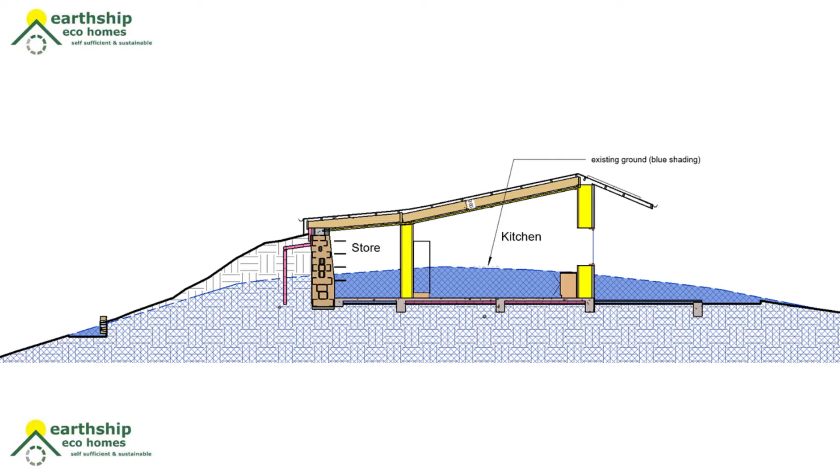So one of the first things that happened was Evie, as the project manager, owner-builder, she called up South Coast Sound and Civil, the earthworks contractor, to scrape off the top of that ridgeline. You can see there in blue, so I think about 100 tons of earth was stockpiled, ready to build the Tyre Wall and the earth berm that you see on the left of the slide there. So this photo is taken about a month ago. You can see the Tyre Wall on the right there.

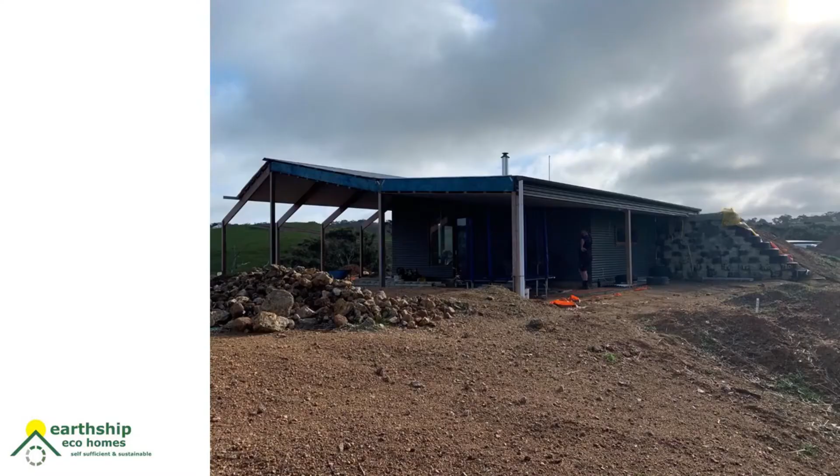Evie's doing a great job managing the budget. They're going to hit about 580 grand, which includes about 70,000 bucks worth of off-grid systems. Batteries, panels, rainwater tanks, septic system, all that business. And they're in about month 12 at the moment and hoping to get in by Christmas. And I think this is a fantastic achievement by some owner builders. So just a few shots of the building in September.

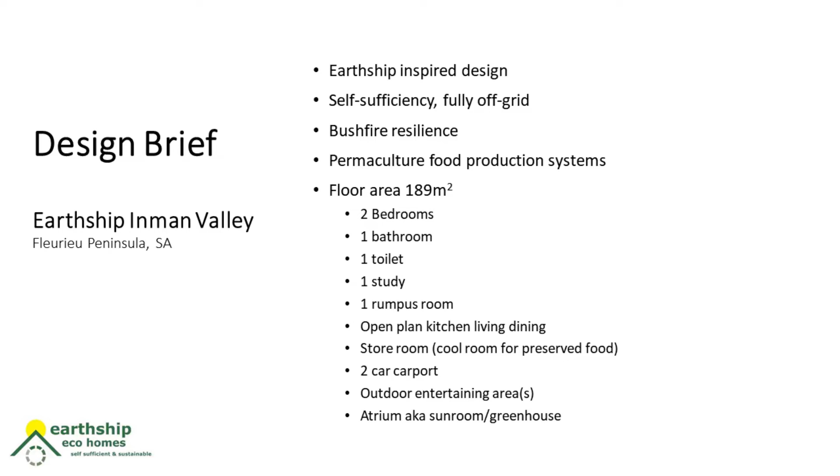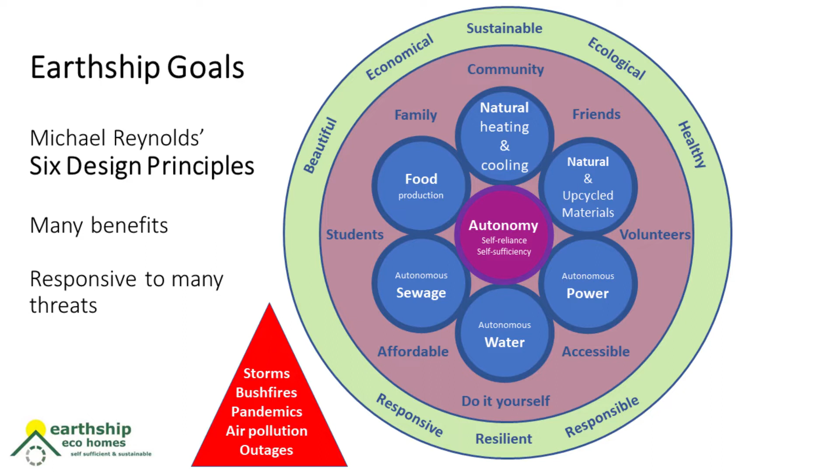But for this presentation, I want to focus on the one at the top there, natural heating and cooling, and also some of these themes like the volunteers, the students, family, friends helping build a community around this project.

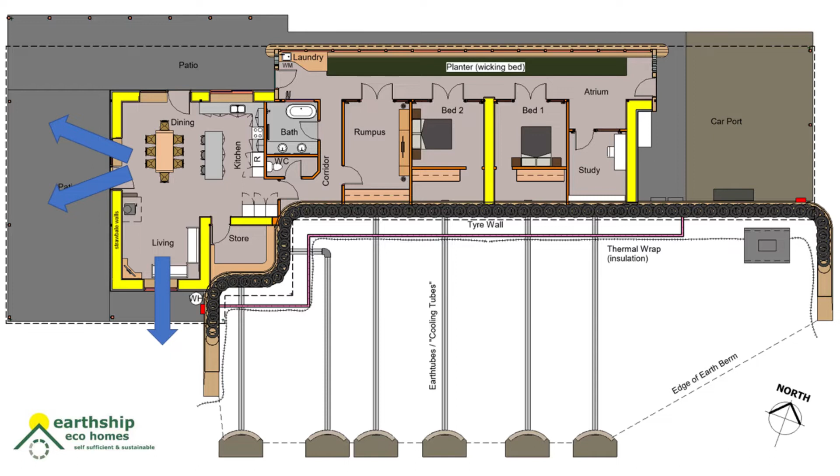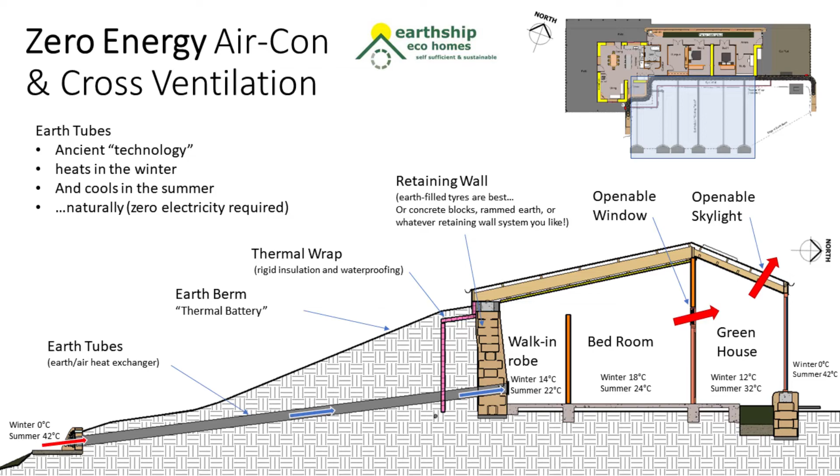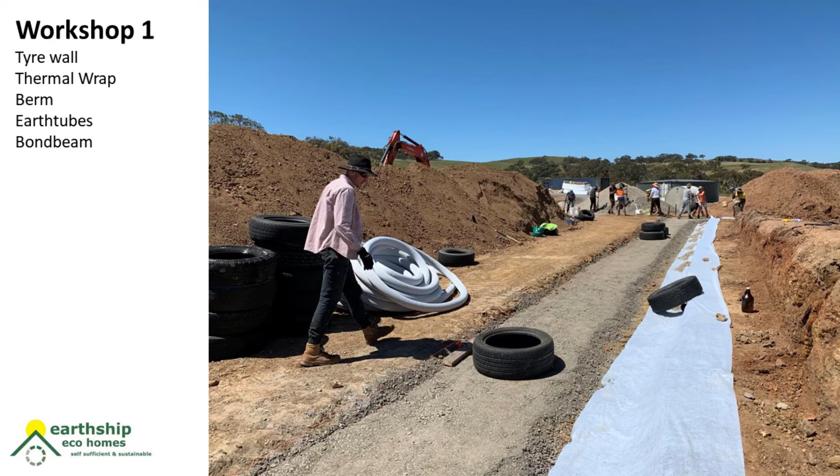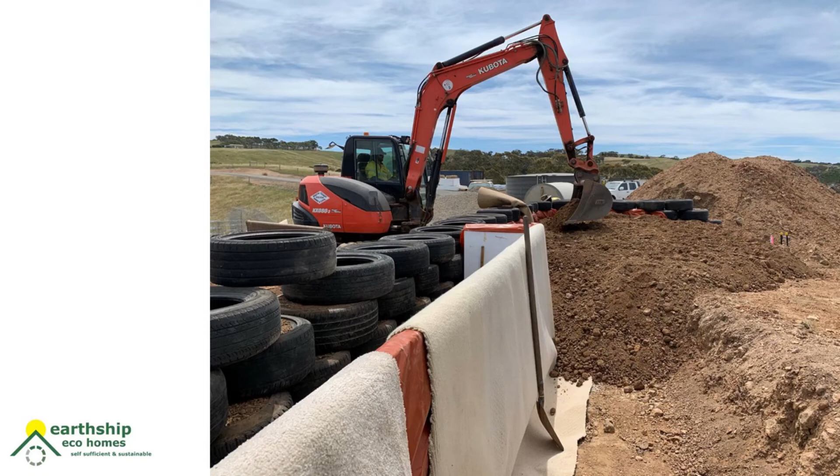I'm just now going to flick fairly quickly through a whole bunch of slides. This is day one of our first workshop last October. You're going to see this Tyre Wall under construction. It got built in about 3 weeks. We had about 30 volunteers. COVID actually messed with us a little bit. We had our first COVID lockdown in November last year, if you recall. So we were on site for about 4 weeks, camping, having a lot of fun.

So, you know, this is one of the Earthship things, is really trying to inspire people and make them realize that they can get involved in the construction of their own homes. That's the earth tube on the south side of the building. Tyre wall's getting higher and higher.

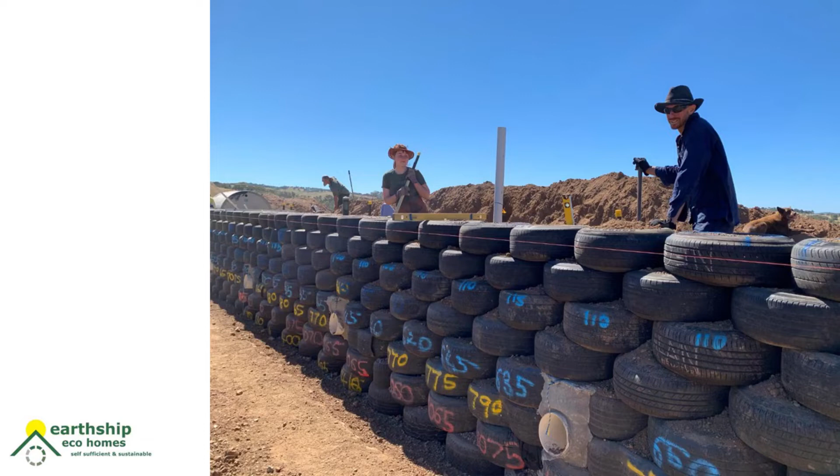Am I going for time, Ken?

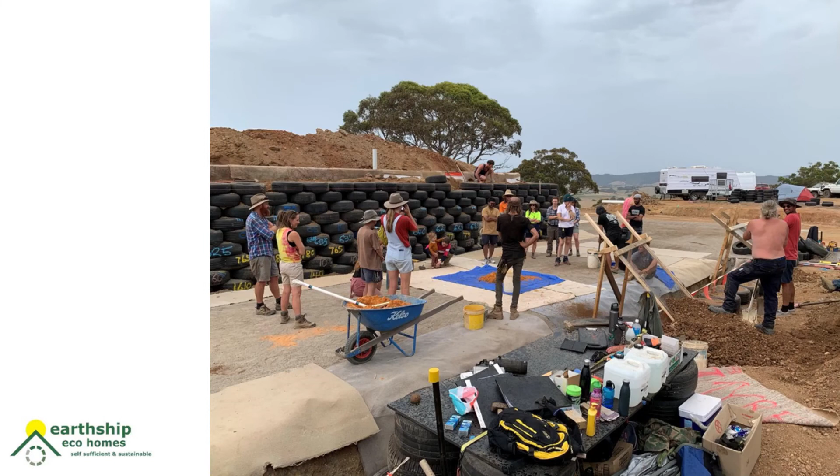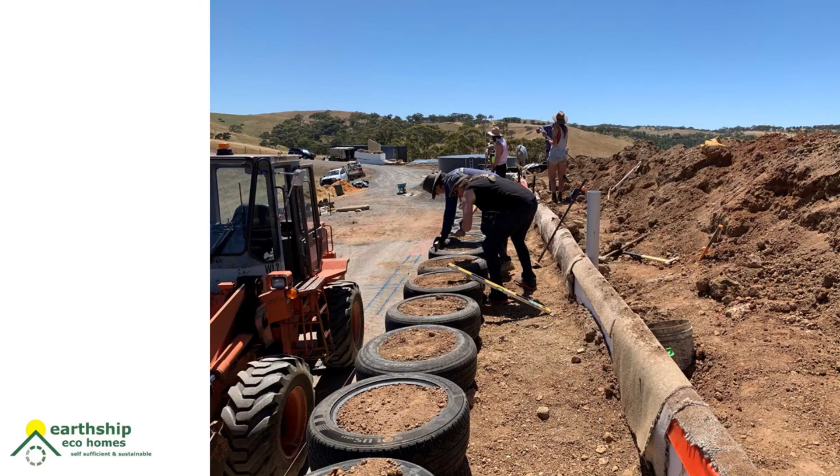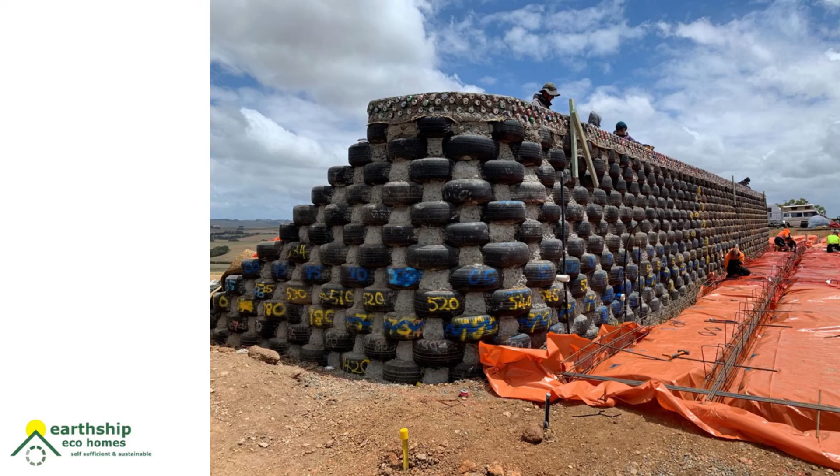You can see here the rigid insulation that goes in behind the Tyre wall and some of the waterproofing. Here we're starting to mix some cob. There's a cob man. That's not really part of the building. The cob goes on the Tyre walls to make them flat and ready to receive render. This is the concrete beam that goes on top of the Tyre wall, built with can wall formwork, lost formwork. That just helps us get that concrete beam done cheap and cheery with volunteer labour.

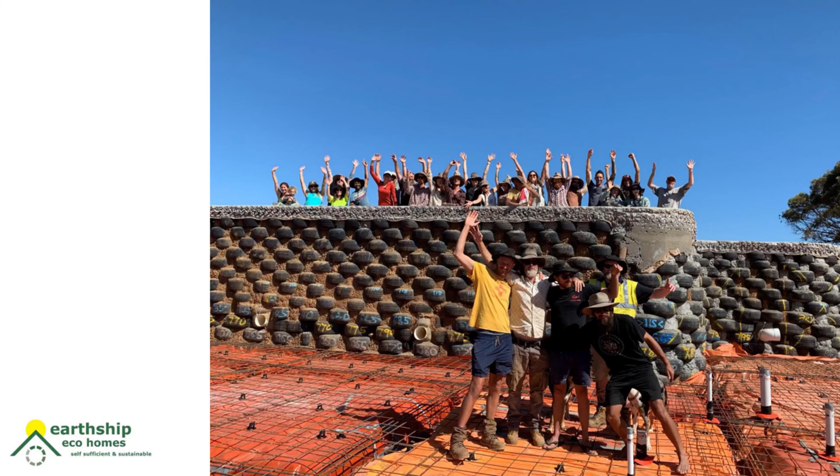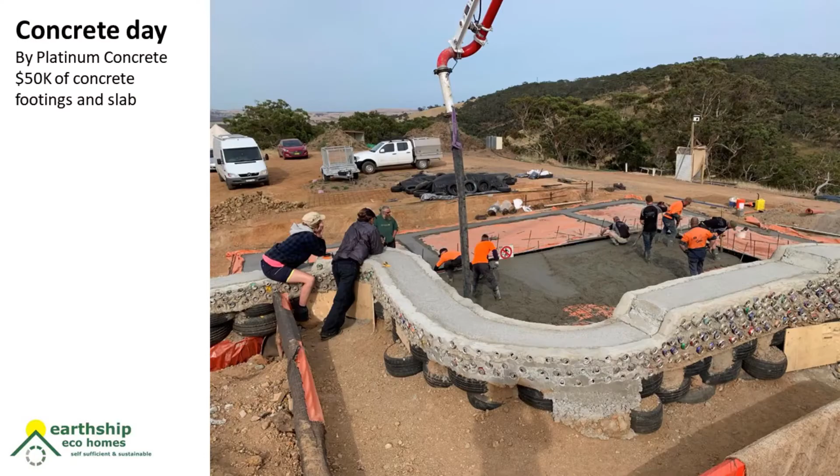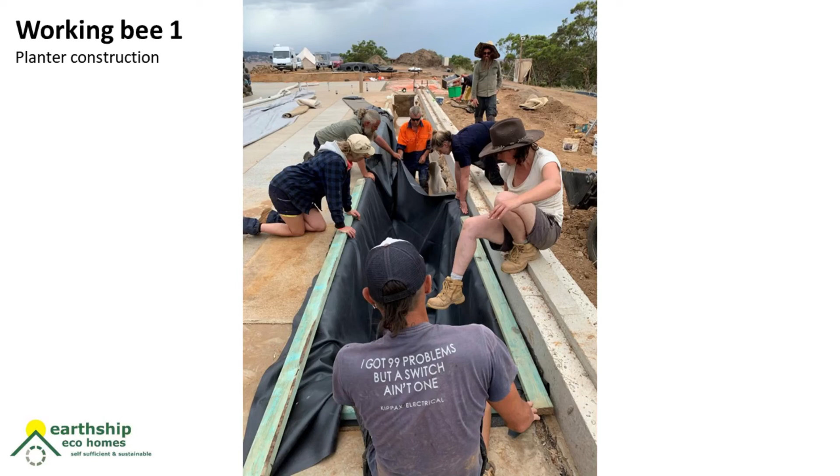Slab reinforcing, that's the team there on the last day of the workshop. Tyre wall all done, bond beam done. And this is a quick little video, drone footage of the Tyre wall, what a bunch of 30 fairly inexperienced people managed to achieve. This is the concrete pour, about 50 grand worth of concrete, and a team of concreters came in to do that. We went back for a couple of working bees, which just means a sort of one-day event with some of the volunteers that came on the first big workshop.

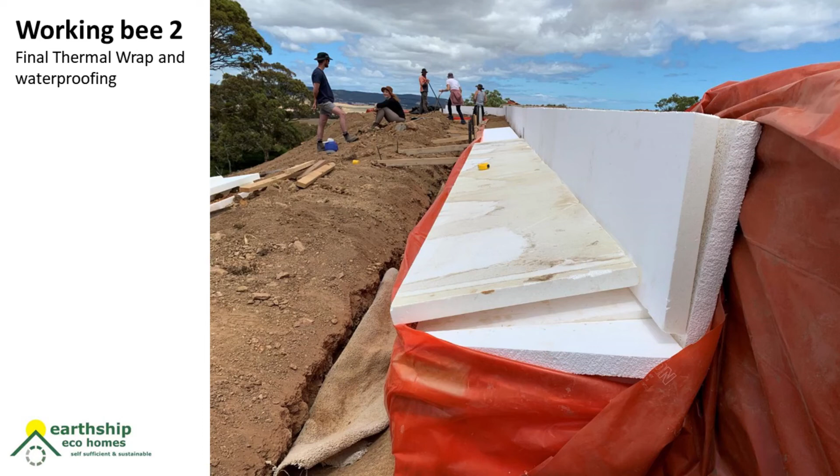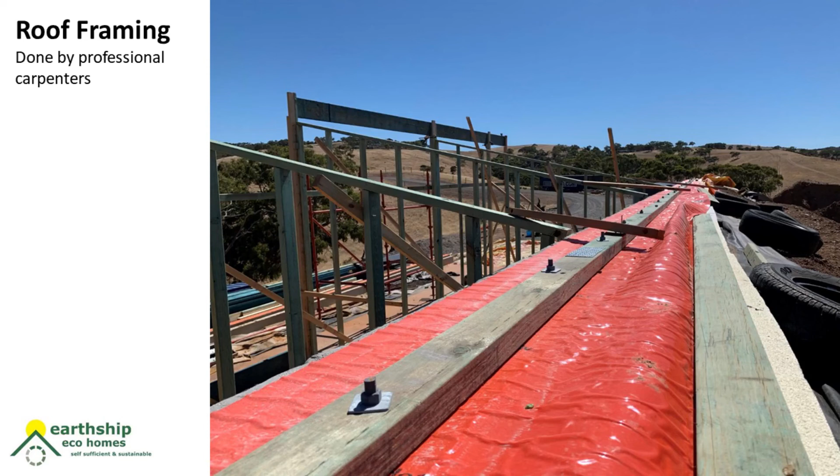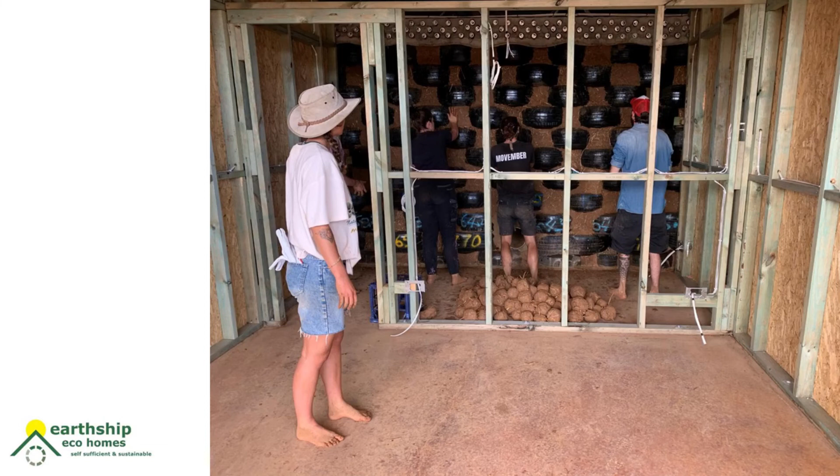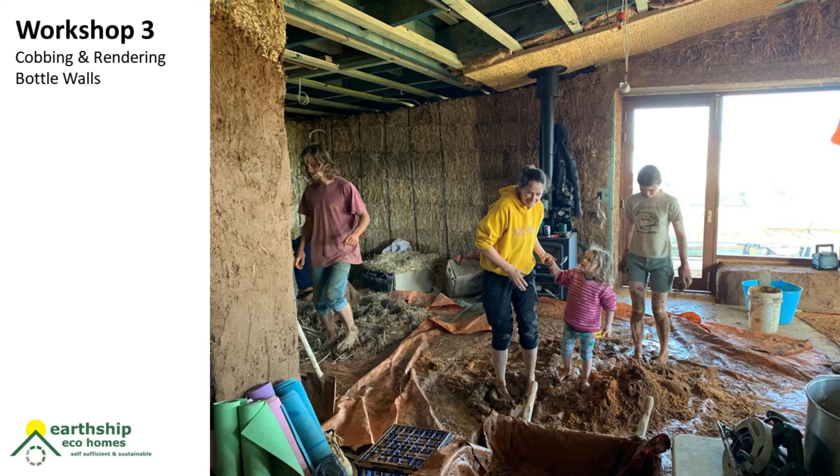This is the planter where the grey water gets treated. This is a finish on the insulation at the back of the building, the waterproofing on the back of the building, rubber sheet, framing, all done by the carpenters. And then we went back again for another workshop to do straw bale install, more cobbing on the Tyre wall. These are bottle bricks, bottle walls at each end of the greenhouse. And I'm getting to the end now. This is the final workshop we've done, which was all about getting mud on the straw bale walls and finishing off the bottle bricks, getting the building to lock up stage. And that was only a few weeks ago now.